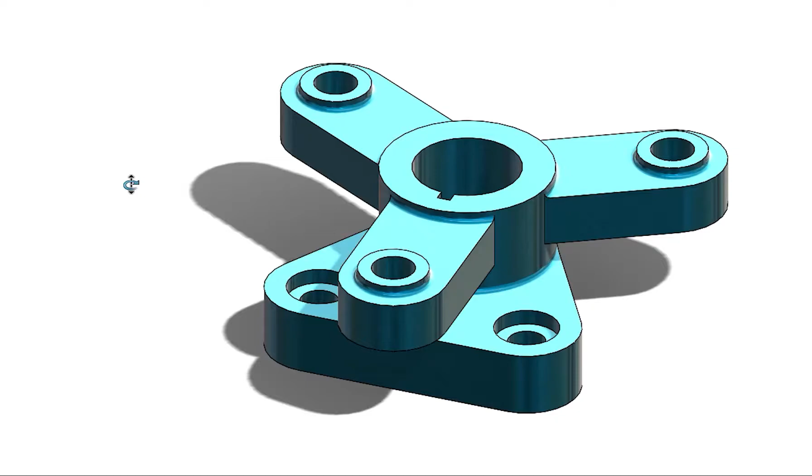Today we are going to make this simple part as an exercise for beginners. This is not so very difficult. This is 80 millimeter distance from here to here, and 45 from this center to the center of this hole, and 25 millimeter is the thickness of the plate, the base plate, this one. So let's start and see what we can do.

I'll open a new part.

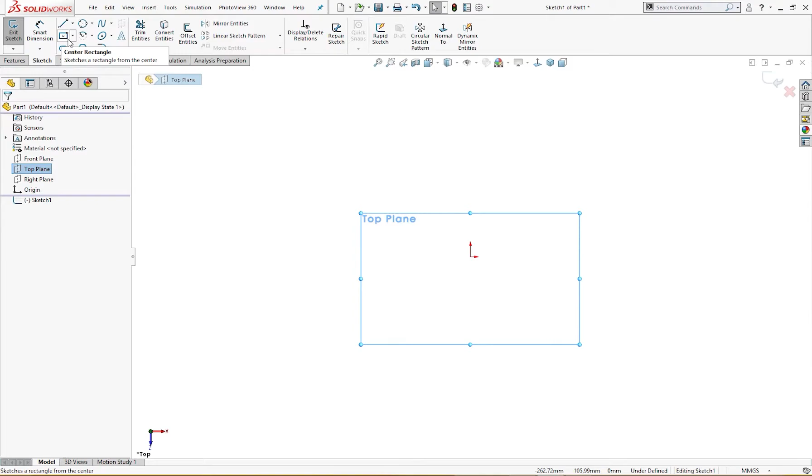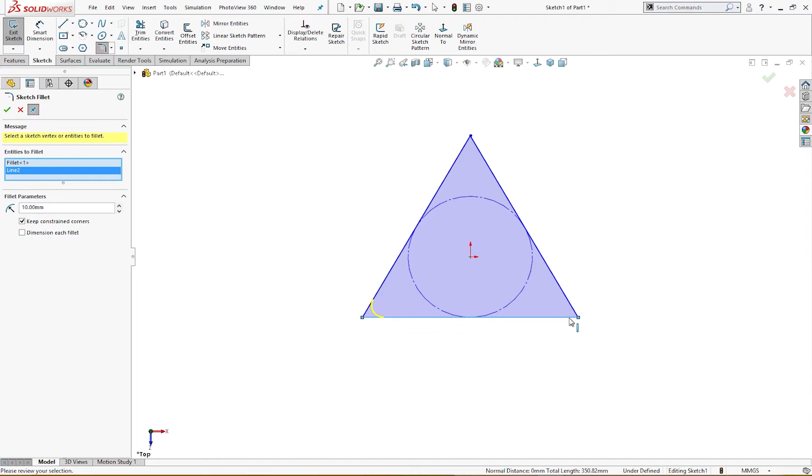On the top plane, I will draw a polygon, 3-side polygon, like so, and give it a relation of horizontal, and I will press S key and give it a fillet of 20 millimeter here, 20, 20 millimeter, 20, and this one 20.

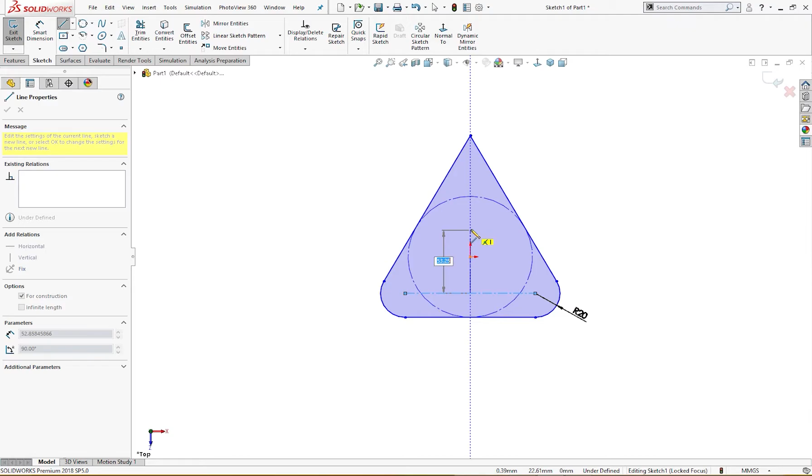I will draw a line from here, center line from here to here, and another center line from the midpoint of this to up, and give it a dimension of 45 millimeter. 45. Okay.

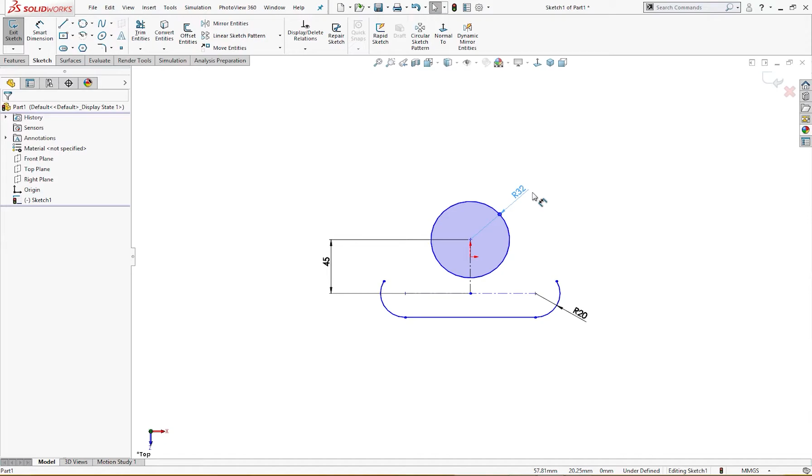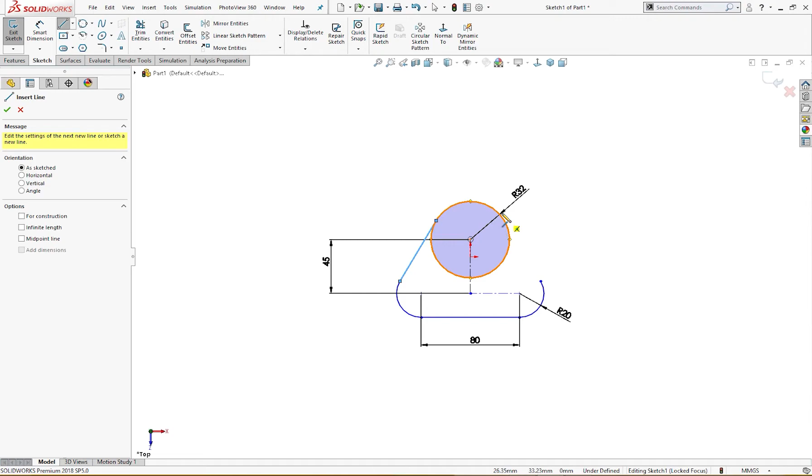Like so. I will draw a few lines, connect to this, and another line from here to this. I will trim the extra. I don't need these.

I will draw a circle, center point circle, from the center of this to this. I will make it construction geometry. I will make both. This is already tangent, but I will make it tangent.

I will confirm it. This is tangent, this is not tangent, this is tangent, this is, and this is a tangent. This and this should be tangent, and this also should be tangent. Control Z.

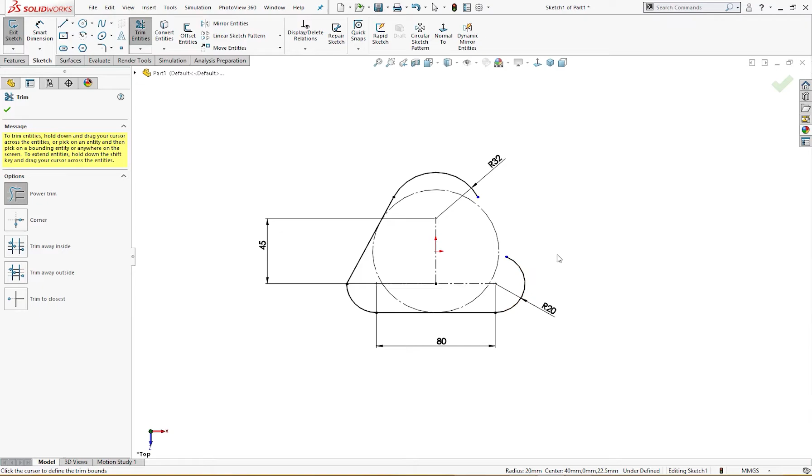I will take the center of this and bring it here. Let me delete this line, and with the trim tool I will extend this and draw another line, draw a line and make it tangent to this.

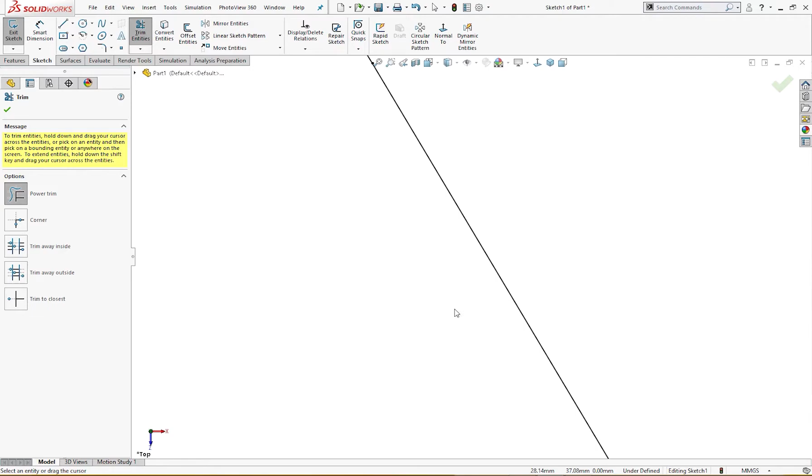This and this line should be tangent, like so. I will trim the extra line here, and I will trim this also.

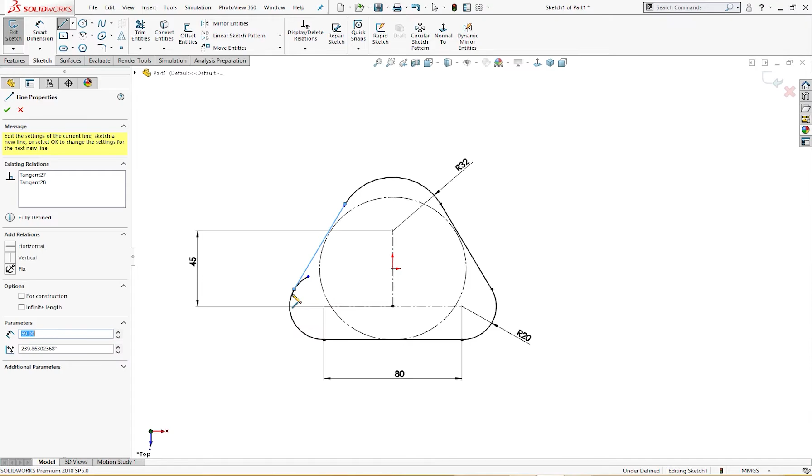The sketch is fully defined, but there is another problem here, so I will delete this, and again I will use the trim tool and extend it a little bit, draw a line from here to the tangent of this. I will delete the extra with the trim tool, like so, and also this.

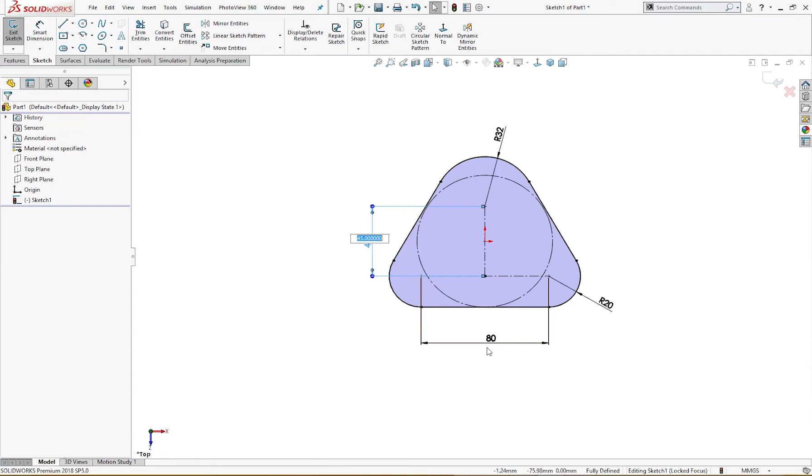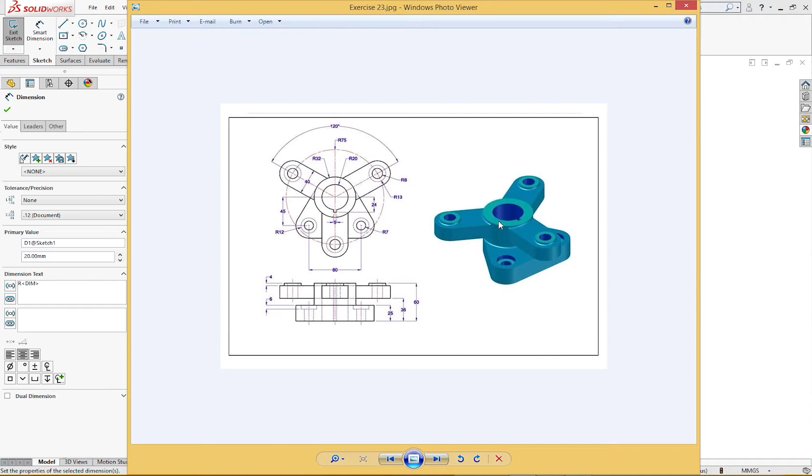The sketch is fully defined. This is 32, this is 32 millimeter, this is 45, this is 80 millimeter, radius is 20 as per drawing, radius is not given, but it is 20 millimeter here, and this radius is 32 millimeter here, and center distance is 80 millimeter and 45 millimeter from center to this and center of these holes. Okay, center of these, the holes will come here, so I will extrude it.

Up to 25 millimeter. Oh, not 225, 25 millimeter. Okay.

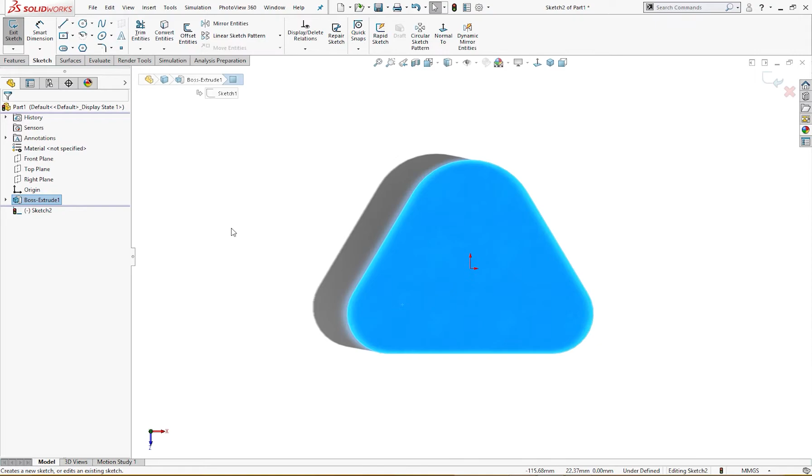On this face I will draw circles, wake up center point and make it, let me check, this is 12 millimeter radius and this is 7 millimeter radius. Okay, 12 times 2 and 7 times 2.

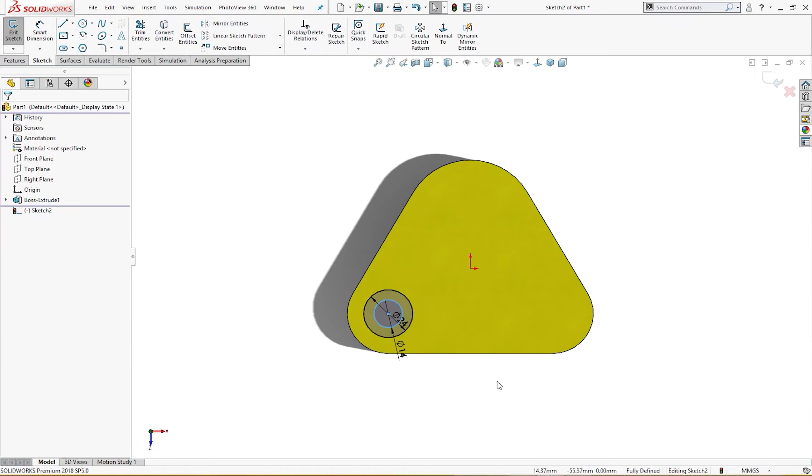I will draw a center line from here to here, and I will trim, fillet, mirror these entities. Okay, and now I will cut extrude.

I will cut only, I will select the contours, I will select this and this, up to 6 millimeter. Let me check if it is 6 millimeter. Yes, it is 6 millimeter here. It's okay.

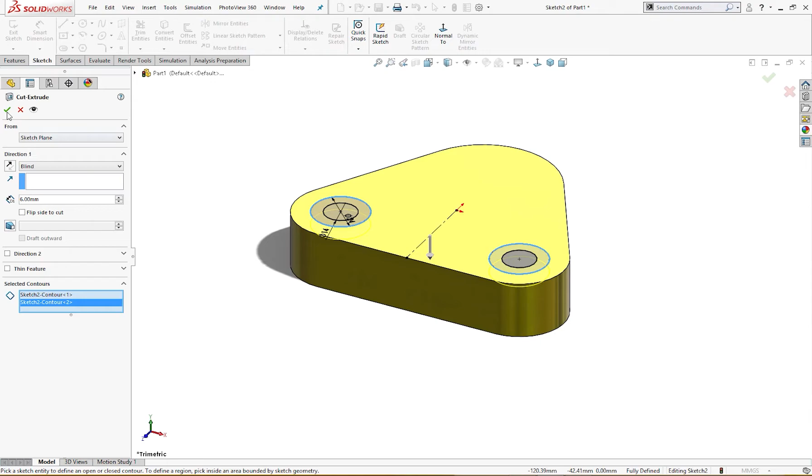Okay, now I'll wake up again this sketch and cut extrude. I will select only this and this and through all. Okay.

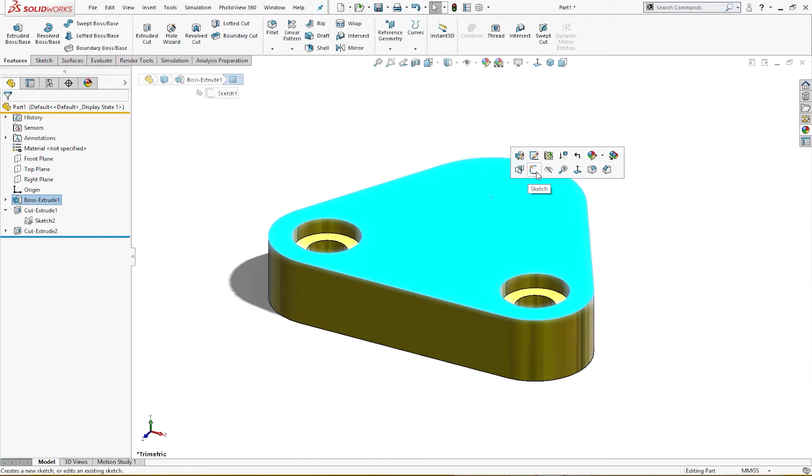This is complete. Now I will draw a sketch over here, a circle set of this center, and make it coincident with this. It's 64. Actually it is 32 millimeters radius. 64. I will make it 32 millimeter radius. Radius is 32.

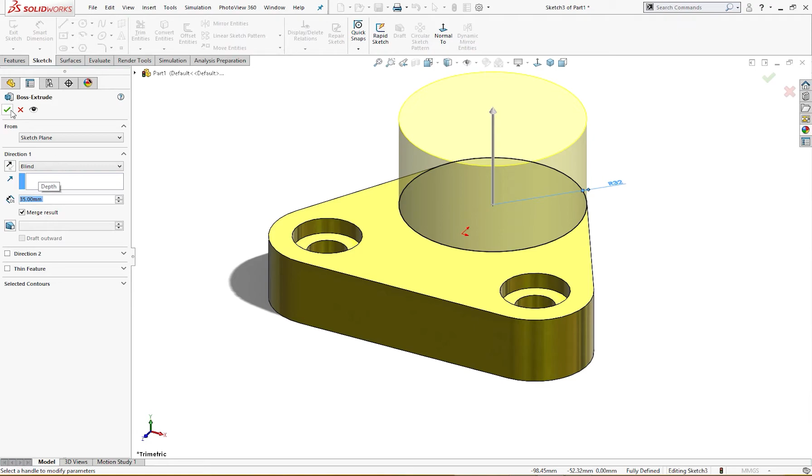As in the drawing, I will extrude up to 60 millimeter minus 25 millimeter. 60 minus 25 millimeter. 60 is total height, and the minus 25 we already made this. So I will go for 60 minus 25 is 35 millimeter. Okay, this is extruded. Now I will make a plane.

I will take this and give it a distance of 36 millimeter and flip the direction, because this is starting from 36 millimeter, and I'm going to make this part 36 millimeter high from the bottom of this part.

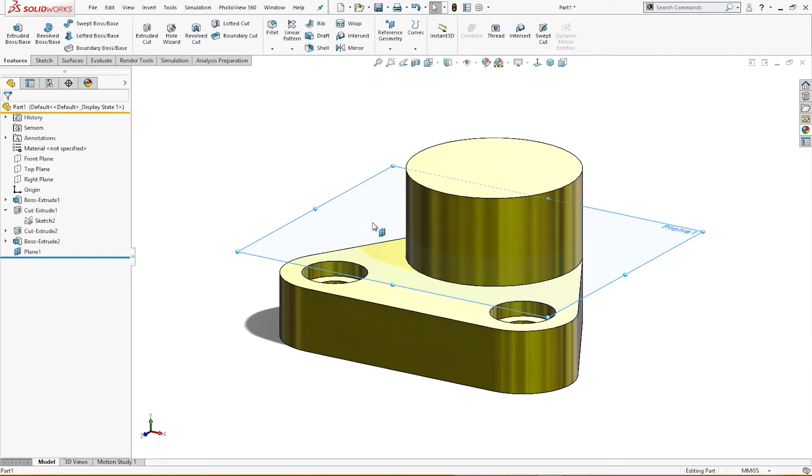On this plane I will draw a sketch using the normal tool. I will draw a rectangle from here to here, and take the midpoint and merge coincident them, so it will remain 40 millimeter.

Let me check. The radius of this is 20 millimeter. This is 40 millimeter, written here. This is 40 millimeter. Okay, I will draw a 3-point arc.

3-point arc from here to here, and I will bring this like so. I will delete this. I'll make these all.

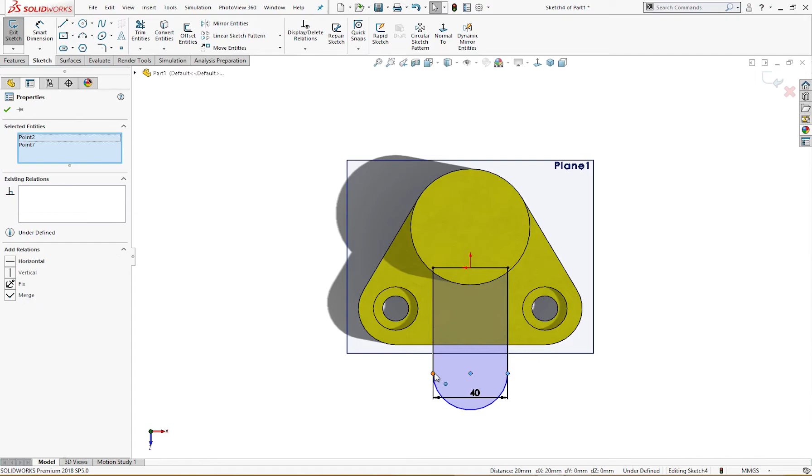I will give it a dimension. Dimension is already given, but I did not give it from here to here. What is the dimension here? Let's check. This is 150 millimeter, 75 millimeter radius, which goes through the center of this circle.

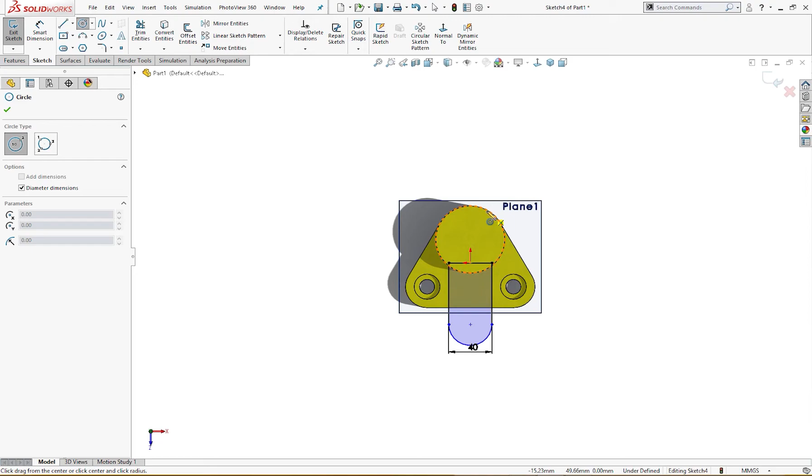So let me draw a circle of radius 75. I will draw a radius of 75 millimeter. 75 times 2, 150 millimeter, and make it.

I will take this and make this. This is fully defined here.

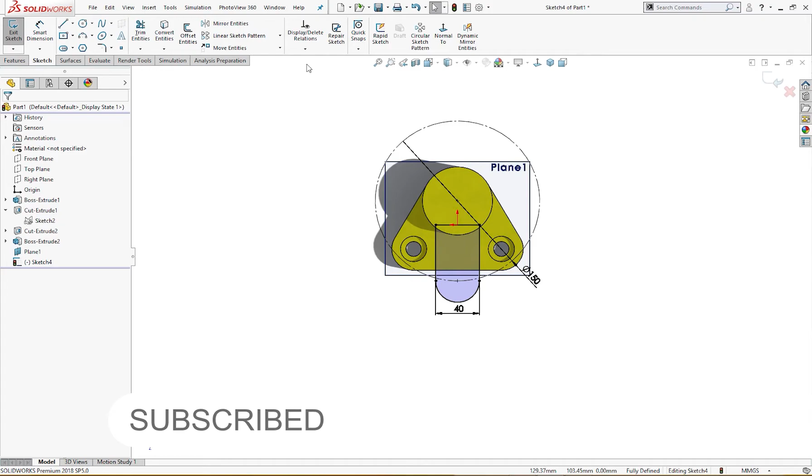Now I will go for circular pattern. I will select these, this line and this line, and make 3 sides. And this point is wrong, I will take this like so.

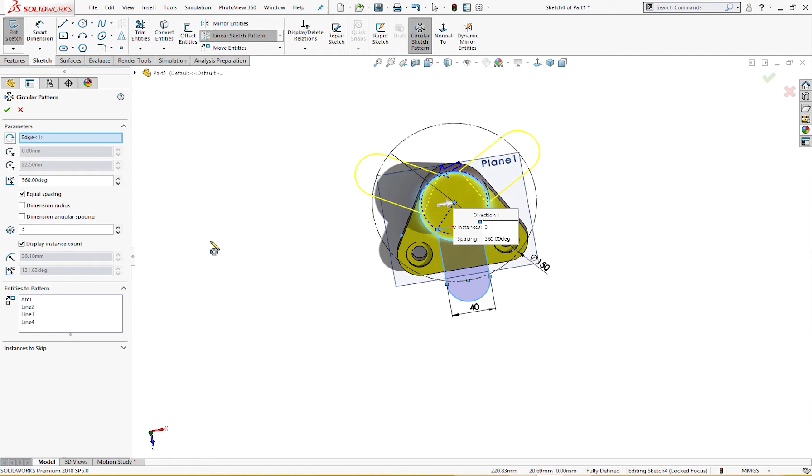The sketch is not fully defined because I have to move this. Now the sketch is fully defined.

I will extrude these 3 entities, reverse direction, 20 millimeters.

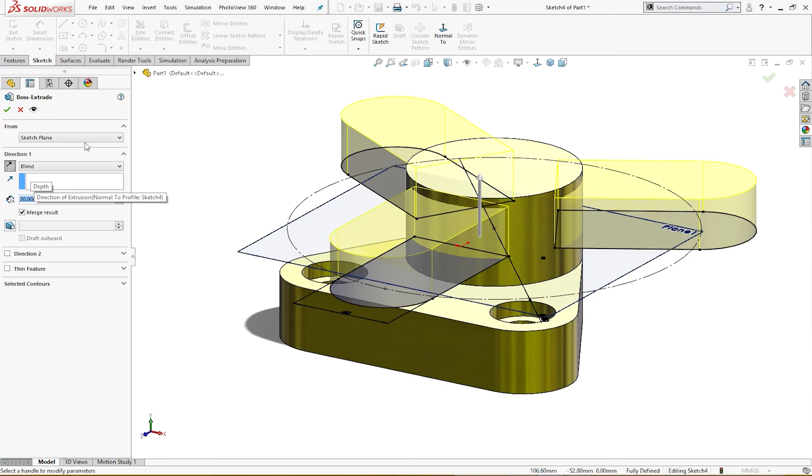Because 20 and 4 is 24 millimeter total. This is 20 and 4 millimeter is this, and 20 is this. So 36 plus 20 is 56, plus 4 is 60. So this is 20 millimeter.

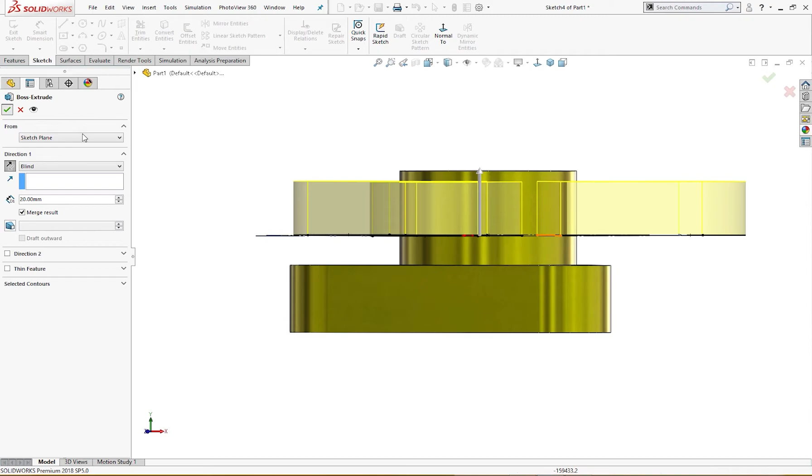Like so. I will hide this plane, draw a sketch over here.

I will give it a dimension of radius 13 millimeter, so I will give it 13 times 2. This is the radius. I will extrude it up to 4 millimeter like so.

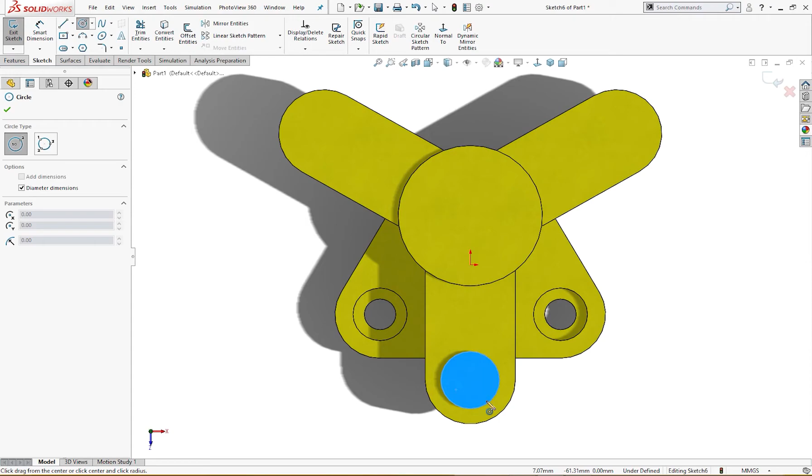I will draw a sketch over here, like so, give it a dimension of 8 millimeter radius here, 8 millimeter, 8 millimeter, 16 millimeter, 16 millimeter.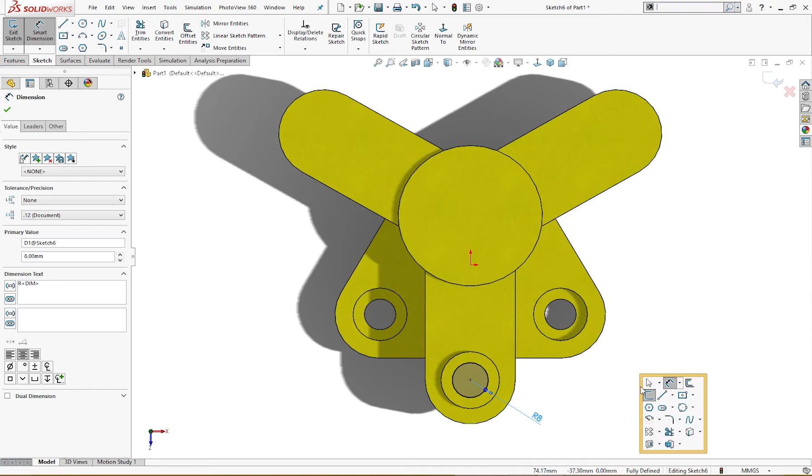I will go select this. I will select this and make it as per drawing, radius 8. I will go for cut extrude and up to next.

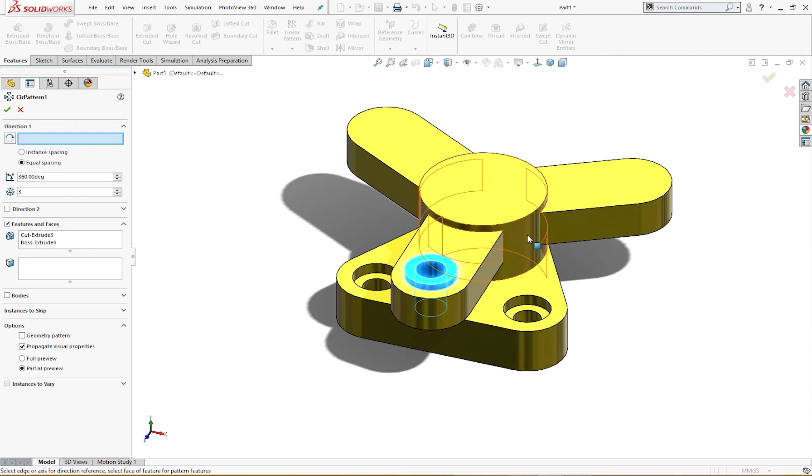I will select this and this boss, and I will go for patterning, circular pattern, 3 sides, and I will select this and okay that.

This is done. All that's needed is here's a hole in here. There is a hole here of, let me check, hole of 20 R20 means 40 millimeter, 40 millimeter hole.

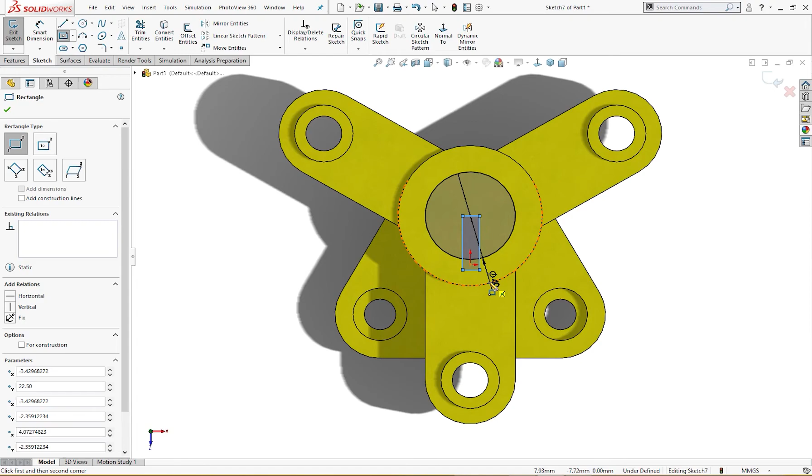I will draw a sketch from here to here like so. I will select the midpoint and coincide with this, so when I will move this, it will move both sides and locked here.

So this is 24, given from here to here is 24, like so, and this is 5 millimeter.

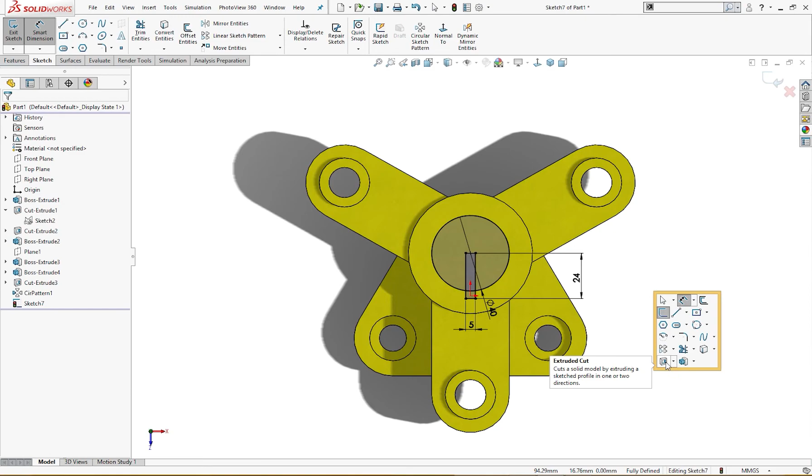Sketch is fully defined. I will cut extrude it. I will select this and this, and through all. Okay, the part is almost complete.

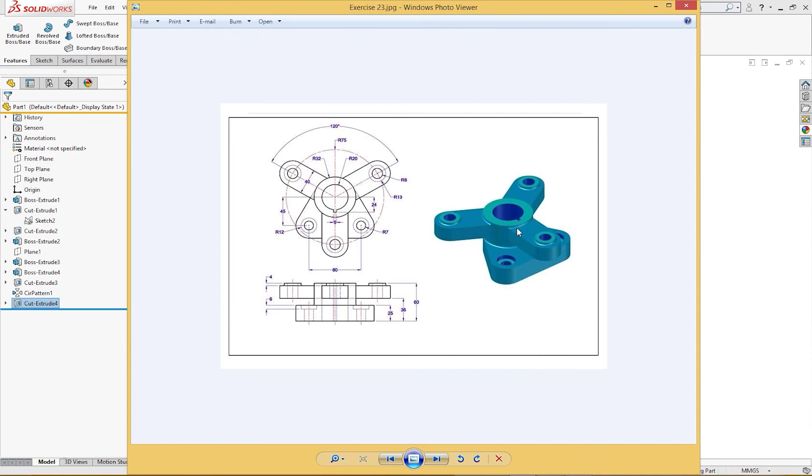Only what is left is the fillets of 2 millimeter, not shown in the drawing, but there are fillets here. You can see here there are fillets of 2 millimeter here, so I will fillet them all these places.

Fillet of 2 millimeter. I will select this face. I will select this one and this one.

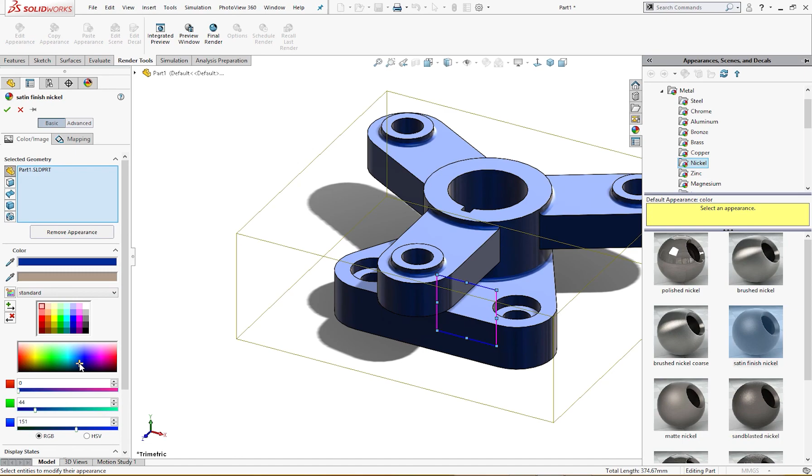Okay, the part is complete. Let me change the appearance. I don't like this appearance, so I will make it something like that. I think it looks good.

The part is complete. There is nothing more to do.